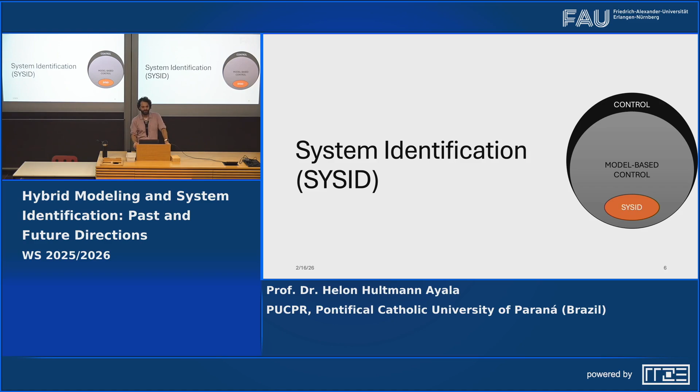And once you're running the control system, which typically is related to a critical operation, like a rocket or an aircraft, you have to be able to substantiate your design decisions. As an engineer, you want to use a model because it helps to quantify, and it also makes it possible to justify your decisions. And inside model-based control, there is system identification, which is the field within control systems related to building mathematical models purely from data.

So let me give you an example. What is system identification? Say your boss comes to you and says, you have to design a controller for this system. You cannot tell him, okay boss, I will just do that if you hand me a transfer function for the system. You have to somehow build this transfer function yourself. So if you're into model-based control, which is most commonly found, you need to do something related to modeling at the end of the day. So what you can do, if you want to use data, at some point in the product development phases, you'll be able to do that.

You can ask a question to the system. What is asking a question to a physical system? You just apply an input or an excitation signal to it, which will be designed by the control law itself. This is an example of the data set we're using right now. You can define the amplitude and the frequency range that is going to be excited in order to acquire the data. In this example, we did a multisine excitation signal, which we designed using Fourier coefficients and then inverted, with random phase. This is one way of doing that.

There are many types of ways of designing a signal such like that. And then once you ask the question, the system is going to reply to you, right? So you can do measurements, right? So this is the result of the measurement that we did.

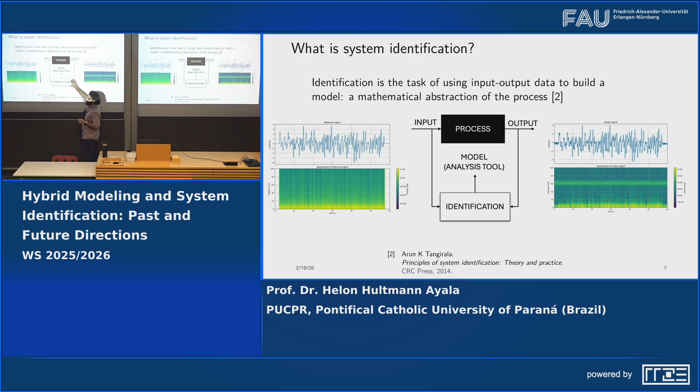So once you have the input and output data, and this means that you're asking a question to the system, it is replying to you, you can do what we call identification, right? So you're using basically input and output data, and throughout the process of identification, you get, in the end of the day, if everything goes well, a model that is going to be important for an analysis tool. So everything departs from building a model, and that's how we do using real-world data, okay?

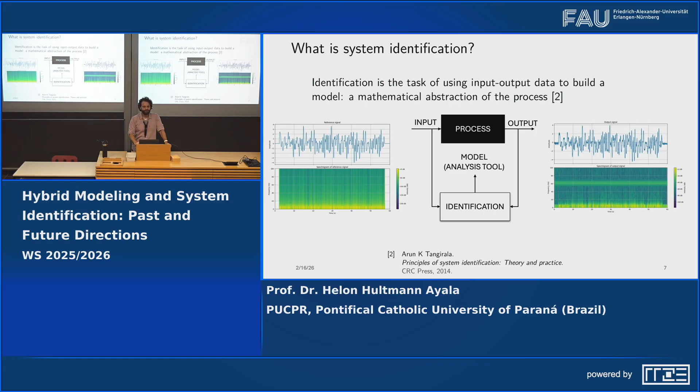Anyone wants to comment on this? It's fine, system identification? So I'll give you another example. So there is a student, a master's student, that is building a two-wheeled inverted pendulum robot. So imagine that you have two legs. All the structure is 3D printed, sorry.

And we have here two DC motors, which command the wheels of the robot. And we also have 4 servos there that are like the hips of the robot, so it can stretch and control the position of the legs. So in this robot, those 2 motors are the same. I mean, they are the same model, but they behave differently, okay? So how do we control a robot like this? Using system identification and controls.

So the first step would be to control the velocity of the wheels of this robot. And how can we do that? We can ask the question, who are you, to the motor. And how can we do that? The simplest thing that I can imagine is applying a step function to the voltage of the motor. And what happens? It starts to spin, okay? And this velocity is measured through the optical encoders. And we can use this response in order to quantify or model this motor, yeah?

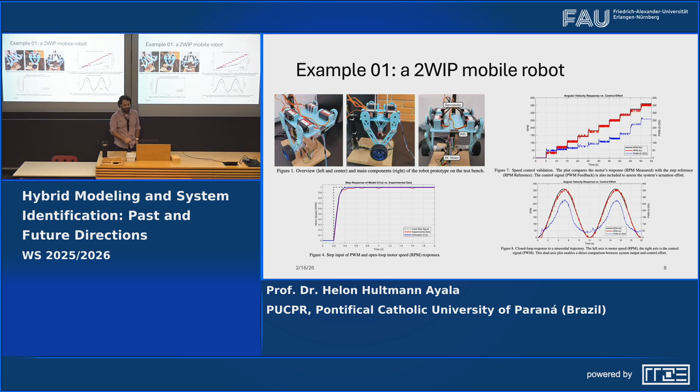So yeah, this is very simple. I mean, this is a first-order system, right? But even though, it is very useful because then we can build controllers. So what I'm showing you here is the result of the control of this simple DC motor. What we have here is a reference signal in black lines, and the red one is the resulting velocity that is measured. Okay, so even though the signal is noisy, the result is pretty decent. I mean, we're only using a transfer function with 2 parameters, with a gain and a time constant, and that's it. And then we do the design offline, and we implement it in the real robot, okay?

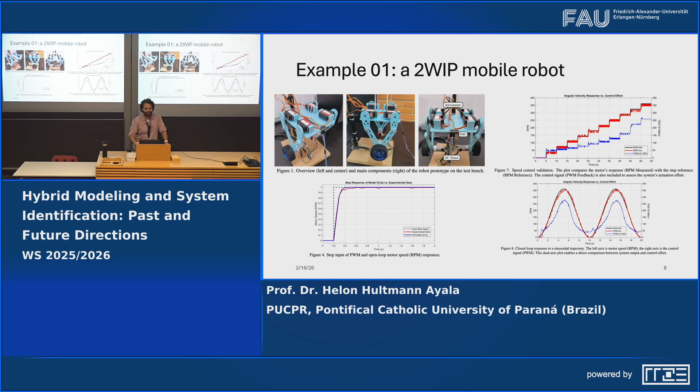And we can see also here from the excitation signals that are used to command the system, that the system is nonlinear, right? Because for the same change in the reference, the inputs are different. If the system were linear, they would be exactly the same for all step changes. This means that our model here is invalid or that it is not useful? No, it was good. So there is a matter of purpose in modeling too. I mean, what is the best modeling paradigm? So I don't believe in best modeling paradigm or something like this.

But in any case, we have basically two opposing sides when we talk about modeling paradigms and system identification. The first would be the white box approach, where we go and measure, okay, what is the mass of this bottle? What is the friction parameter from the bottle to the table? So we can measure that. So if we are able to build a model measuring parameters like that, that would be a white box model, okay? And on the opposite side, there is the black box modeling paradigm. So the black box modeling paradigm would be not using physics at all. I mean, we're only using data in the end of the day.

What to me, I mean, after some 20 years doing system identification, I would say that those white box or black box modeling paradigms, they don't exist, really, because you're always using some knowledge about the system, and you're always using some data at some point. So they're more like a conceptual part of the modeling process, and they depend also on who is building the model. So if I'm building a model and I know how to model bottles, or motors, as we just showed, it's going to be a different model from someone that doesn't know how to do that, but is savvy with data, for example.

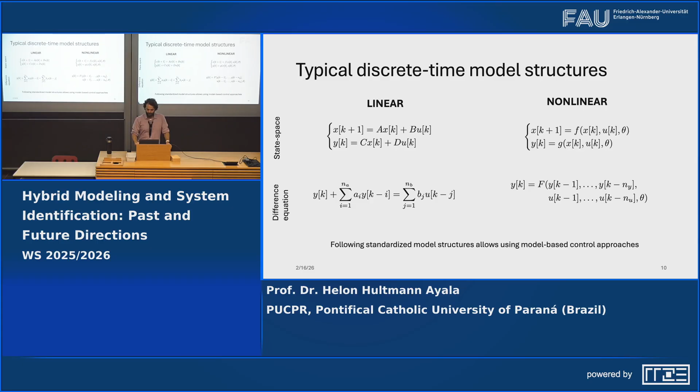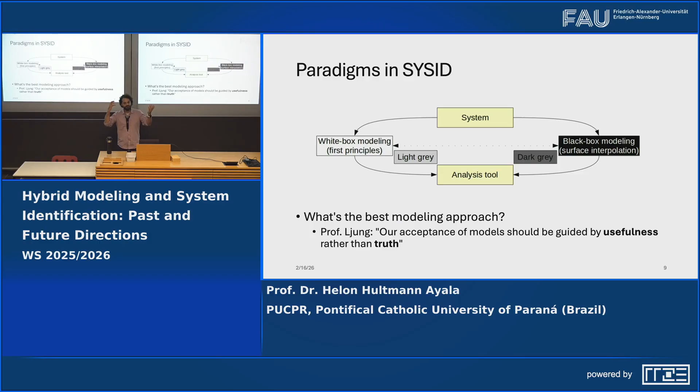In this context, we also discuss some hybrid modeling paradigms. When I was doing those slides, I found a very recent paper from Mukherjee and Zavala, and they are trying to categorize what kind of hybrid models we can get. Once we have white box models and black box models, how can we hybridize them so that we can get a better result? I'm going to show you some examples of prior work on this, and also how this has impacted our work so far here in Erlangen.

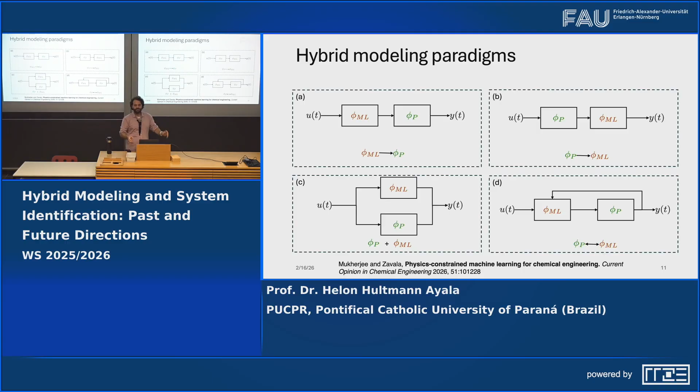So how can we do that? Maybe in letter A, you're adapting your input function so that it's cleaner for the physical model. Or maybe the physical model is going to be adjusted by the black box model. Or, and this is something that we tried many times and it tends to work very well, use the black box model to model the residuals of the physical model. You can also try some more fancy configurations. I'm going to show you an example of this for modeling flexible manipulators.

Talking about system identification, I'm lecturing a graduate course on system identification for some years now. I translated all the code and all the information into a kind of website or book, so that you can access it if you wish. We have background material with cooked numerical examples, and activities with real-world data. There are numerous case studies using real-world data for the modeling part.

Okay, so that was the first part. I hope I didn't lose you thus far. Now I'm going to briefly discuss our prior work, mostly related to hybrid modeling. How can hybrid modeling be used synergistically in the system identification domain? The first example is a paper by Ingrid. She did her PhD in PUC-Rio, and finished maybe last year, in 24, I think.

She was supervised mostly by Hans, but as he was an emeritus professor, he needed a co-supervisor, and he called me, and we managed to work very well. In Rio there are many oil companies, and many applications are oil-company oriented because there tends to be funding available. There's an atmosphere among the departments to work on this field. I never thought of working on this, but when I arrived they had those applications, and I found them very interesting.

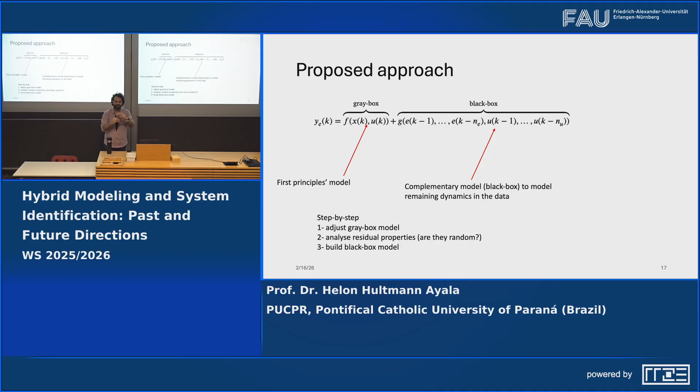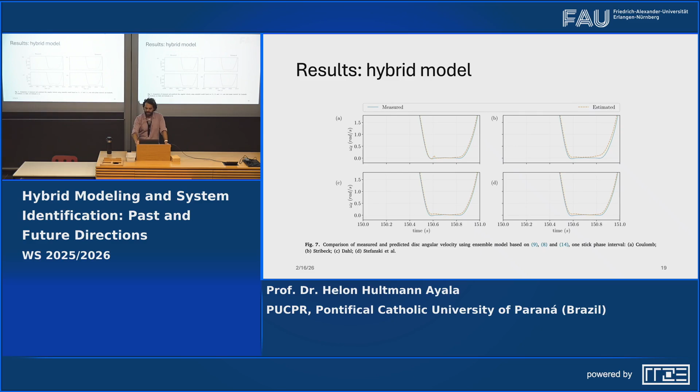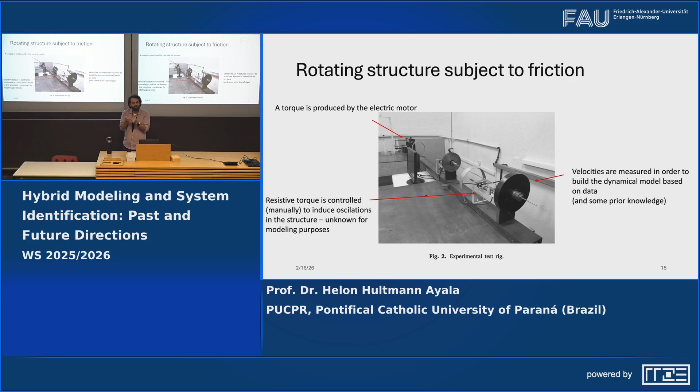As we can see here, we're even able to emulate a little bit of this situation. But once we add another layer of complexity, the results improve a lot with respect to this situation. And this is important because when the inertias are stopped and we are applying a torque to the motor, what happens is that in the application side, the structure of the drilling string accumulates energy. So if there is a torque being applied there and this inertia is stopped, the rod is accumulating energy. And once it releases this energy, it can be catastrophic. So representing this phenomena is very important.

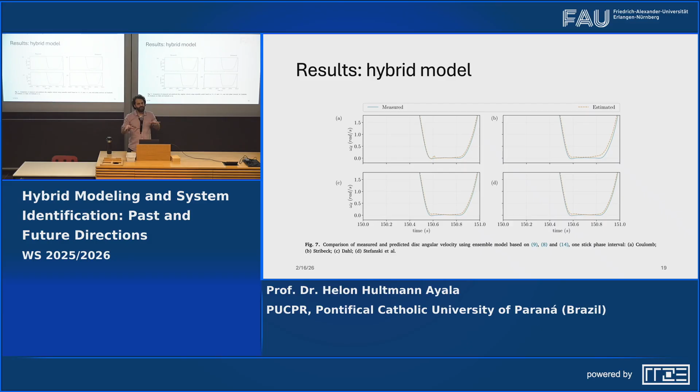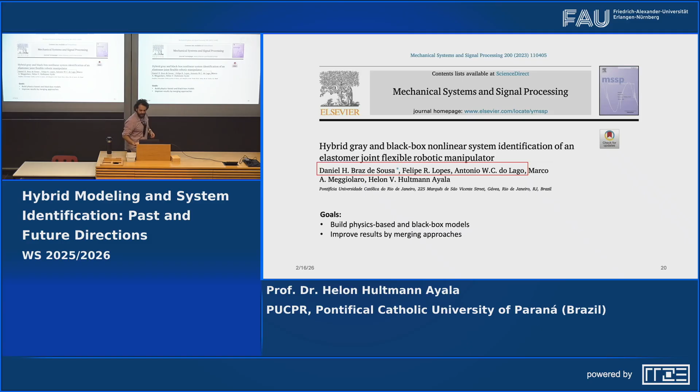So I think that this was the first paper that we wrote on hybridizing physical models with black box models. And then a bit later, there were also other students interested in robotics. Daniel finished his PhD a couple of years back, Felipe too, and Antonio was a brilliant master student. And this was a work that me and Marco, who's into robotics, developed together, so he also could supervise the other students. So the goal here was pretty much the same as in the paper before. We're trying to build physical models that have a good matching with the data, but also can be improved with the hybrid approach. So this case study is also very hard to model physically, and I'm going to explain why. In this case, we have a flexible joint.

Okay, I'm going to point with the mouse here. In this case, what happens is that we have a rubber here. What you see here in black is a rubber. And this inner part is connected to the axis of the motor, and this outer part is connected to the end effector. So in this situation, we can control not only the position of the end effector, but also the load that it is exerting on the environment. So for example, if you have a robot that is interacting with a human, it is important that you also control the load that is applied by the end effector. So that's what we did here.

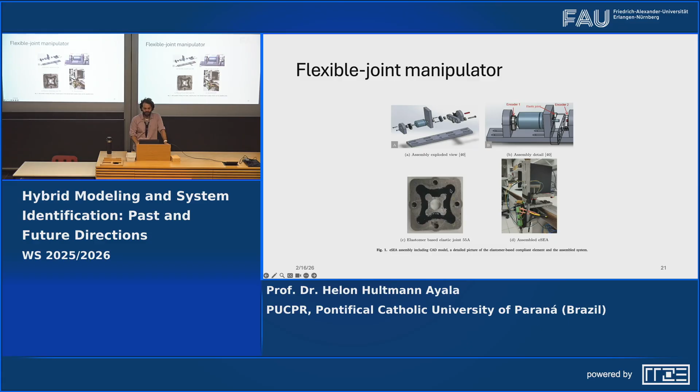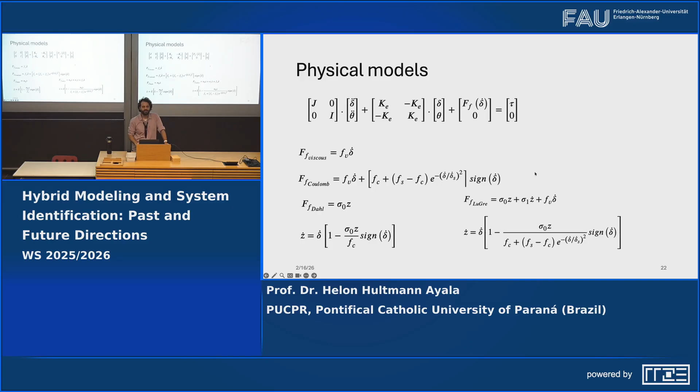We built this flexible joint, but the whole problem was, okay, now we have a flexible joint, but how does it behave? How can we simulate it? And it's very difficult to model this. We started with the simplest model that we can imagine, which would be a simple linear relation. We're just modeling it as a spring. And then we are adding nonlinear friction, and the nonlinear friction models are very similar to those that we used in the paper from Ingrid. And here, most interestingly, the architecture that improved the results the most was a structure like this. We have a gray box model and a neural network that corrects it in order to add the residual to the response of the gray box model.

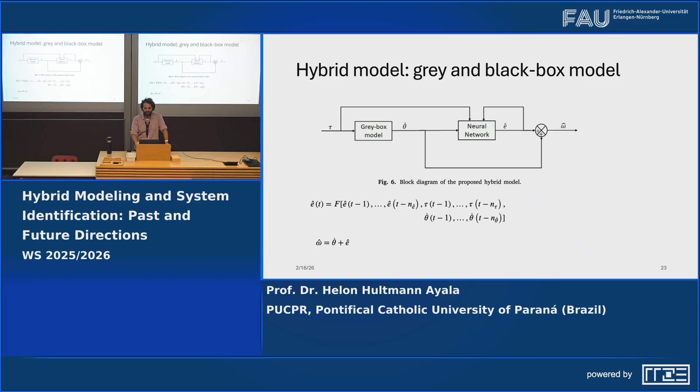So, of course, this is non-trivial, and we tried many different possibilities until we came to this final best architecture for this paper. So here you can see the linear model. From the physical model perspective, the linear model already has a very good matching for these data sets. 0.89 for the R2 is pretty decent. But it was improved by the nonlinear models. The LuGre friction model came up to 0.94.

So once we added the black box to this hybrid modeling approach, it was able to reduce significantly the MSE by the end of the day. So that was the result we got from this paper. And it's also interesting because what is the best hybrid architecture? Each time that we try it, it is different. At least this is my experience thus far.

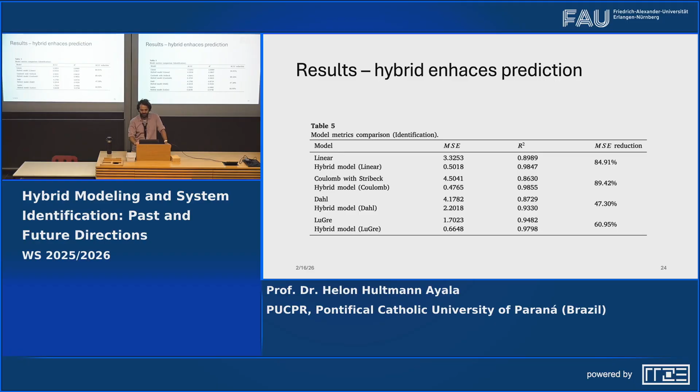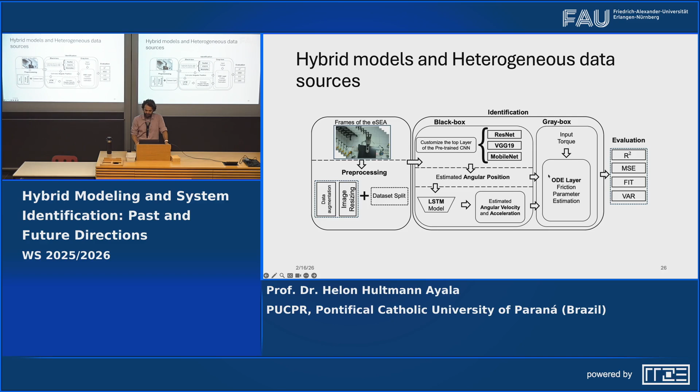Building models from video is much more difficult. And this is also relevant to our proposal here, because we'll also try to do that with another case study, in a more controlled environment. So how we did the multimodal system identification here: we're using some off-the-shelf models used for the ImageNet competition or the like, in order to extract the kinematic information. From this kinematic information, we have the physical models that we can also try to build on.

So takeaways from our prior work and how it affects what we're going to discuss in the third and last part of the talk would be that the hybrid architectures always change. We have other papers on this, and each time that we try it, I still don't know why, but the best hybrid architectures vary for each application. So I think it would be good to understand why this happens.

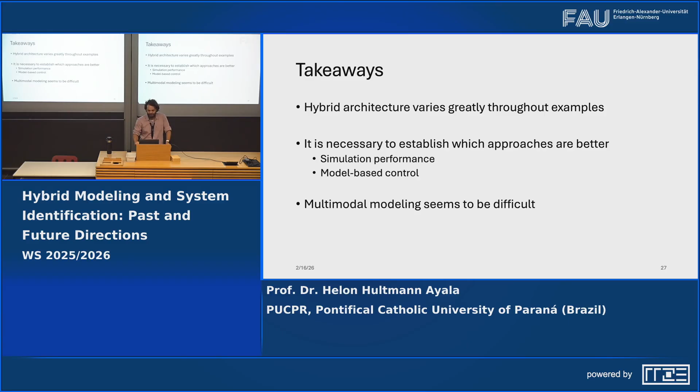Since it improves the prediction power so much, I think it would be a good idea to establish what are the best approaches for each application. And multimodal modeling seems to be very difficult. So those are the takeaways from our prior work.

So now for the third part, anyone want to comment anything so far? We're good? Yeah? So the third part, before we go to lunch.

The third and last part of the talk is the future and ongoing work. This will be mostly related to our joint ERC CNPq project with Professor Henrique. First, I will tell you about the case study for which we did the acquisitions, and then we'll detail the objectives and goals for the short term. If you would like to work on multimodal hybrid model learning, you'll be very welcome to join us in this project.

The motivation for the case study was to start with something simple. This was the most governing factor in choosing this benchmark: starting simple, but still with difficult and interesting questions to answer. This case study was acquired from the ball and beam experiment, a very classic control application. It's basically a beam that you put a ball on top of, and the goal is to control the position of the ball on this beam.

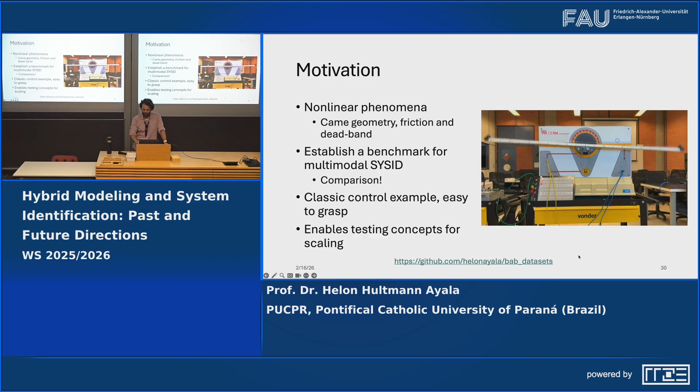So what kind of data sets or questions am I asking this system? So we have 3 types of data sets. The first would be a multisine, which was the same that I discussed in the start of the talk. So in this case, I defined a range of frequency. I think it was 5 hertz, if I'm not mistaken. I'm not sure. And an amplitude of operation so that the beam would not start to

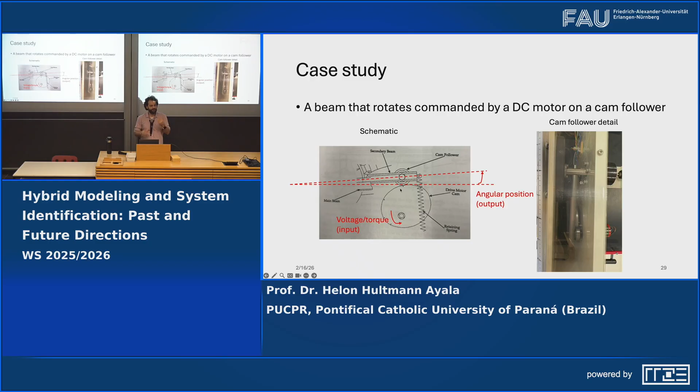pass to a, so let me show you this picture, maybe it's easier to explain like this. I restrain the amplitude of the voltage so that the cam follower is always on this side. So the effect of the nonlinearity of the geometry is not present in this data. So I define an amplitude for the multisine and also a frequency range. And I did this 2 times, 2 realizations of this same data set, which is random, because the phases are random. And that's how the system replied to me.

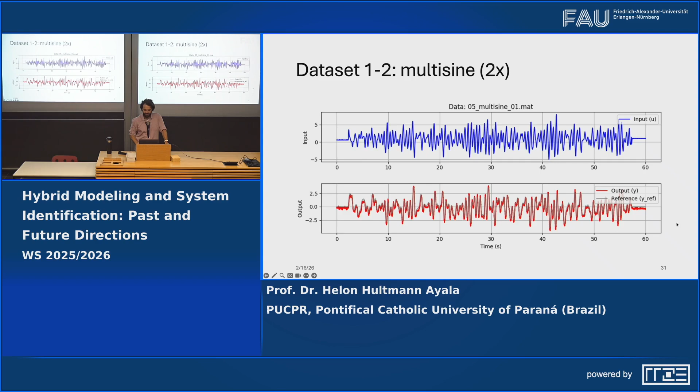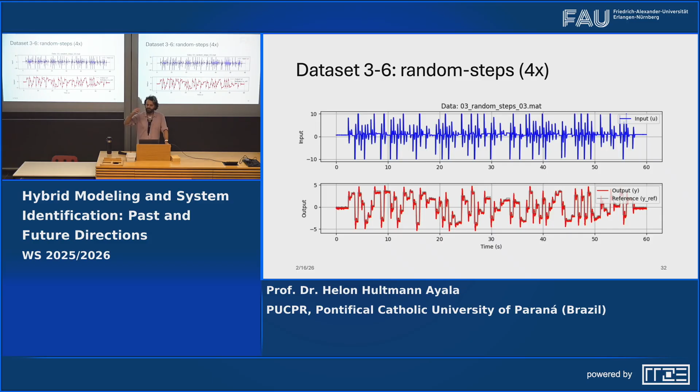So I'm asking a question, who are you? And it's replying to me. And for evaluating how the model performs in something that is more similar to the operation of the system, I also did the sequence of steps for acquiring the signal. And another signal that is also interesting to use is the swept sine, which increases the frequency linearly over time, and it's mostly used for validating the model. So those are the data sets that we have, and also the corresponding video that I'm going to show you afterwards.

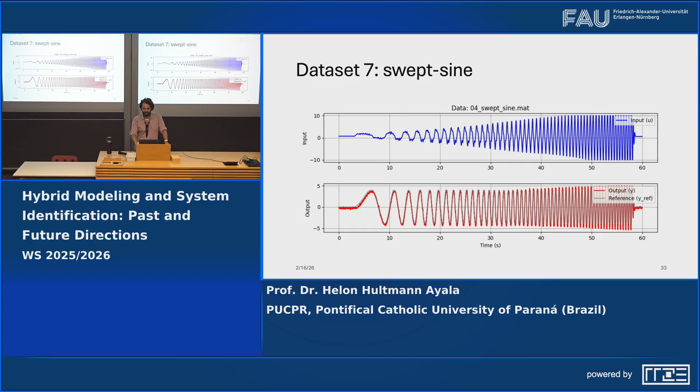My hypothesis is that it's going to impact positively because the predictions are much better and the control laws totally depend on the model that you build. And stage 4 would be the moonshot that we discussed before, to use a higher level control interface with the control system. I mean, we're going to use ChatGPT and ask, okay, make the beam do something that is more meaningful, a more natural language style to interact with the system.

So now I'm going to present to you, Henrique, am I good? Time for a minute? Yeah.

So now I'm going to present you some preliminary results from the work that we've been doing here. Please, a shout out to the Spanish team. Thanks for your help.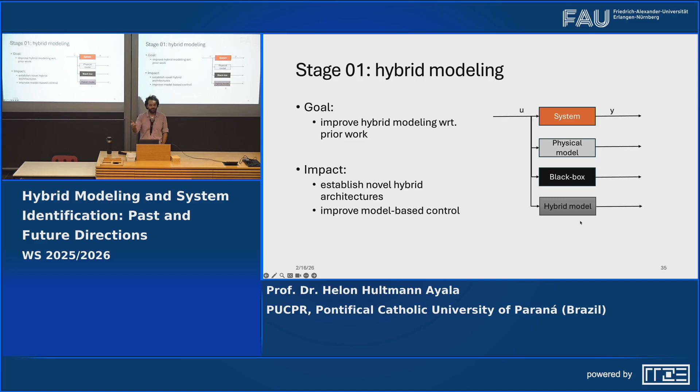So for this system, we first established a physical model. And then we are now comparing to a black box and a hybrid modeling alternative, pretty much in the lines of the prior work that we already did. So let's see how it develops.

So the first linear model, I assume you're familiar with state space equations, but in any case, we here established a linear model, which is basically a spring with a preload. So this delta here is the preload of the spring, which is keeping the beam attached to the cam follower. We have the, how can I say, the spring constant. We also have viscous friction. In here we also have a torque constant. So this tau is translating the voltage command to a torque that we can translate to the mechanical world.

Of course, there are a lot of simplifications here because we are not even including the dynamics of the electromechanical motor. But this is the very first version, so let's see how it does. And for the nonlinear physical model, we are changing this viscous friction model to a more elaborate nonlinear friction model. For the full black box, we're using, in the state space equation, a full black box approach. That means that the state or the transition equation is going to be learned throughout the process entirely.

And the hybrid approach is using part of the physical model and part of the residual model. Well, the residual model is going to be all that the physical model is not able to represent in this transition equation, which is going to be captured, ideally, we hope so, by the black box model.

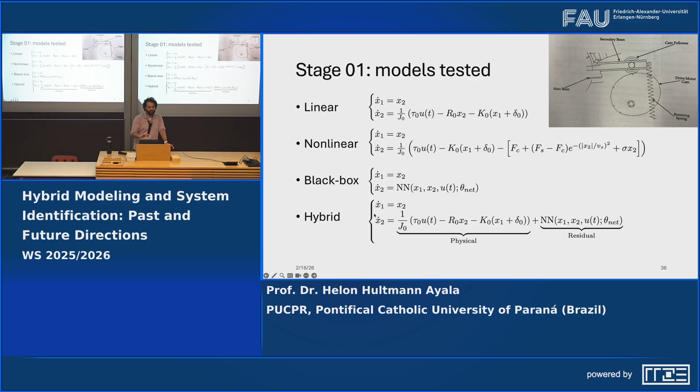And the loss function is calculated only for the position. So we're only comparing the first state because that's what we're measuring. We're not measuring the velocity. We're just estimating the velocity in order to use the initial conditions and calculate the rollouts throughout the calculation of the loss functions.

So then I looked at this result and I thought, okay, maybe the information in the data set is not enough. So what can we do with the data set that we have? Because I'm here, I'm not in Brazil, I cannot do any experiment. What can we do? We can try to figure out another test protocol in order to test other things.

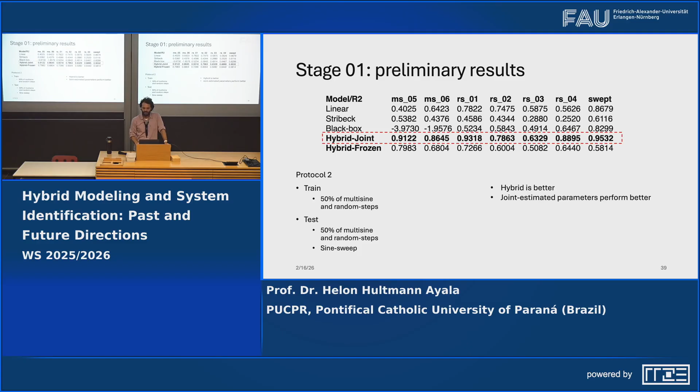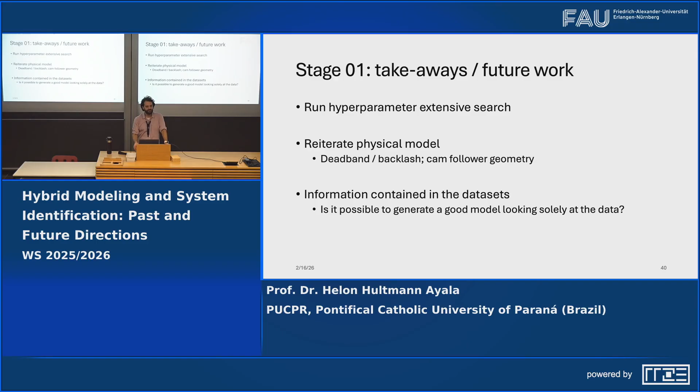So future work. We're going to run some extensive hyperparameter search in order to establish more conclusive conclusions here about the results. There's also the possibility to reiterate the physical models. We can always improve the physical models. And another direction that we still have to, I don't know how we're going to solve this, but how can we establish if the information in the data sets is enough for building the models? So this is our future work.

So for stage 2, we have multimodal hybrid model learning. So now we're going to use the images.

I'm going to rush a little bit on the future work because we're running out of time, and then you have also time to comment on the talk.

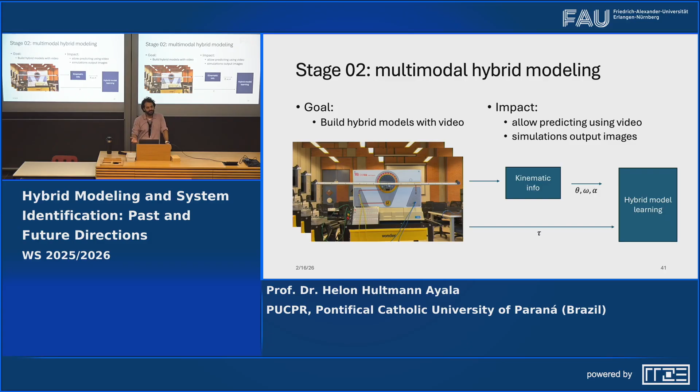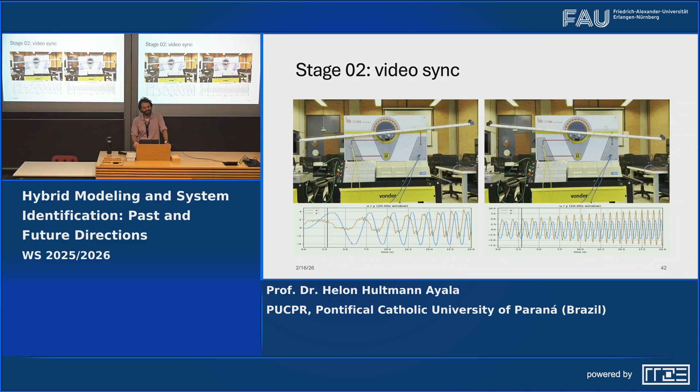We're going to basically use now multimodal information to build the hybrid models. And for this, I spent a lot of time just to get those images synchronized with the videos. It took me a long time to do this. You wouldn't believe it. But in any case, stage 3 would be to use the approximate MPC.

So if you're familiar with MPC, MPC is solved at each sampling interval, finding the optimal control sequence for a receding horizon window, right? That is moving through time. So at each timestamp, we solve an optimization problem in order to define this optimal control sequence. We take the very first sample of the control sequence, apply it to the system, and then we reiterate it in the next time as well.

So this, as you can imagine, is very expensive to do in real time. So that's why we are proposing to use, and this is not new. The first work that I know that used this approach of approximating MPC is from '96 from Camacho, who is also from Spain. He used this approximate MPC idea for controlling a mobile robot with his student.

And how can we approximate the MPC? There are many ways of running MPC fast on embedded computers. Maybe one that we can easily generate with the models and the tools that we have thus far would be to treat this optimization problem as a mapping from the measurements and the references to the control actions. So the optimization problem is basically doing this, right? It takes the references, the current state or the output, and calculates the input that should be generated.

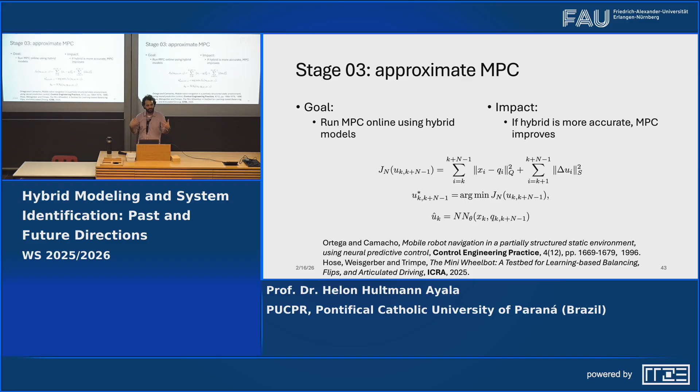And this has in fact been used in very recent work from last year at ICRA, the International Conference on Robotics and Automation. Some German researchers have done this on the Mini Wheelbot, which is a very interesting paper. I recommend you take a look afterwards. That's how they implement it on constrained hardware resources, because the inference for the neural network is very fast compared to an optimization problem, right?

And the higher level command interface would be the moonshot that we discussed: to use some imagination models, like, okay, generate an image for me of the beam at 45 degrees, and then we can use this as a reference for the control system. This should be difficult, but we'll try anyways.